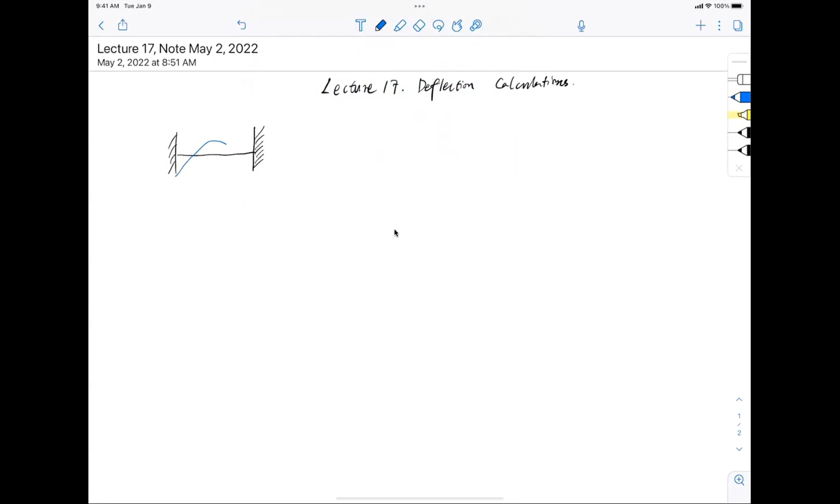And you know, the moment diagram looks like this: it has a negative moment on the left, negative moment on the right, and a positive moment in the middle. And we call this the applied moment. So MA, MA, and MA. This is the applied moment. Now, with this moment diagram, we were supposed to find one thing: only one effective moment of inertia, one IE, okay?

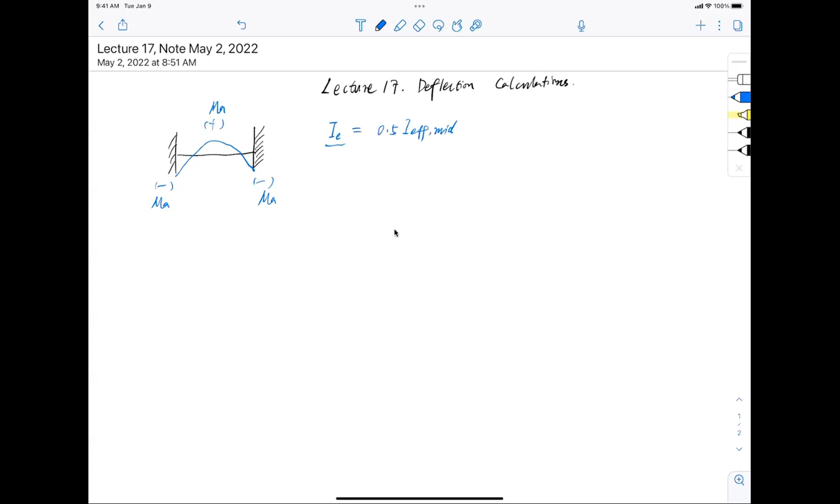Now, given that there's other I effective, we will talk about it, but this is the IE you will be using to calculate the deflection. IE equals 0.5 I effective mid, meaning the I effective at midspan, plus 0.25 of I effective left and I effective right combined. Okay, so that will be the equation for it.

Now, I effective mid, or 1 or 2, follows this equation. That is the cracking moment you calculate for this particular location. If it's midspan, it is positive, so let me just put a sign here. If it's the 1 or 2 end spans, that has to be negative. So that's the cracking moment. And then divided by the applied moment, which is MA mid, or 1 or 2. And this whole thing together in a bracket to the power of 3, multiplied by IGT. IGT is the transformed gross section, and that one has a positive sign as well if it's for the mid section.

So what do you mean by positive? Think of it. If it's positive, it means that the tension is on top. So this is positive. And if it's negative, the tension is on top. That's the difference. So positive for midspan and negative for 1 or 2, the two ends of it. Okay, so that is the IGT.

Now plus the bigger bracket: 1 minus, bracket inside, MCR, the cracking moment for the midspan and 1 and 2 ends again, divided by MA, the applied moment at midspan or 1 or 2, the whole thing to the power of 3 again, close the bracket and multiply by the cracked moment of inertia. Again, this one with a plus sign if it's midspan, and with a negative sign if it's 1 or 2. Okay, so this is the more generic equation for I effective.

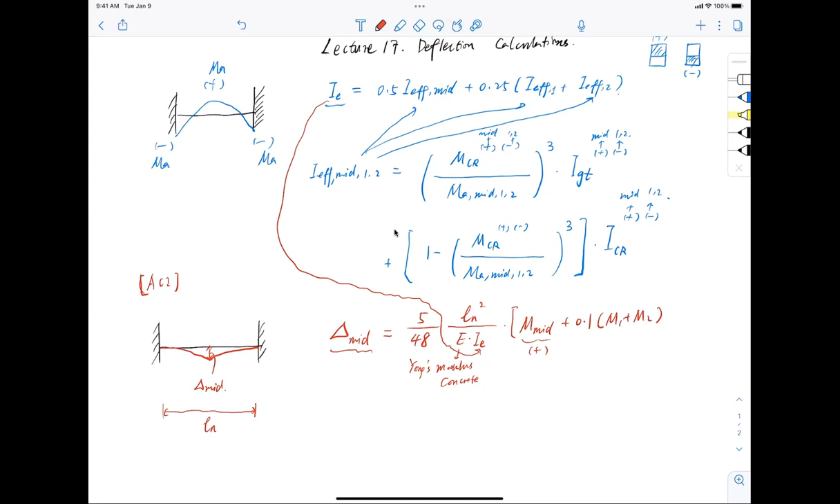So that is the deflection equation. And remember, this is for midspan. Okay, now with that, this concludes the deflection calculation equation.

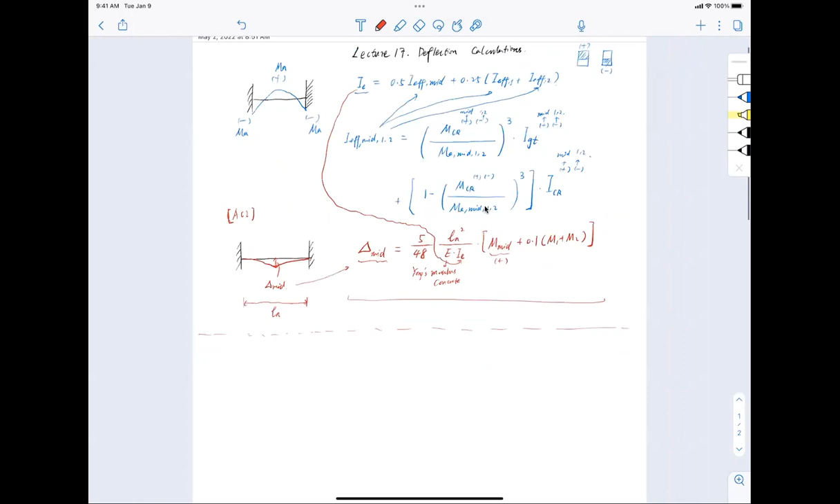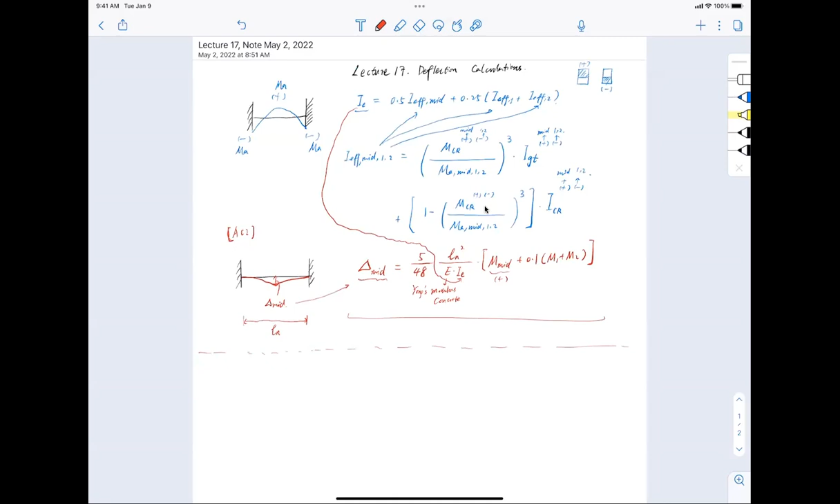Today, we're going to talk about more about this deflection, okay? So what else, right? Now, Bob, you have the IE, have the moment of inertia, you have this equation to calculate deflection. I just plug the number in, I should get deflection, right? What's so much that we need to worry about it, right? Well, there's nothing to worry about, just plug the number, right?

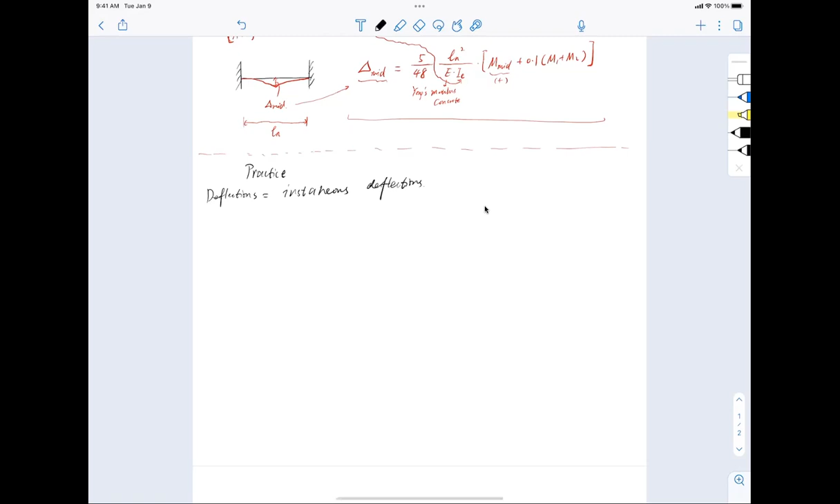However, in the construction practice, right, tells that the deflection has two components. Now the deflection has the instantaneous deflection, and also it has the long-term deflection, okay? So it is two types of deflections combined, okay? So why, right? This instantaneous deflection usually means that once you apply the load to it, instantaneously you have a deflection. Then as time goes by, you also have a long-term deflection, okay?

Now, specifically, let's dive in to see what's going on here, right? So there's delta total, now we call it delta total, is a total deflection, should equal to the instantaneous deflection. However, this instantaneous deflection usually is in terms of live load. I put I here, instantaneous deflection, live load. Okay, now there's also another part of instantaneous deflection that is caused by the dead load, and that one we call it delta ID. All right, pretty much just use the dead load and calculate deflection and call it instantaneous dead load deflection. But be careful.

So you think of it, the live load induced instantaneous deflection will go away if you remove the live load. So once you put something on it, it will deflect. You put it away, it recovers, right? So nothing much to worry about. However, the dead load is always going to be there. So that's a slight difference, okay?

Now, on top of that, some of the live load did not go away. Sometimes, some part of the live load does not go away. And this, they call it sustained live load. And usually we tell you how much percentage of the live load will sustain, okay? How much percentage of live load will sustain. So now you have instantaneous deflection dead load, and this is long-term actually. A little bit confusing, right? This is actually long-term, and this sustained live load is also long-term. Okay, and this is actually short-term.

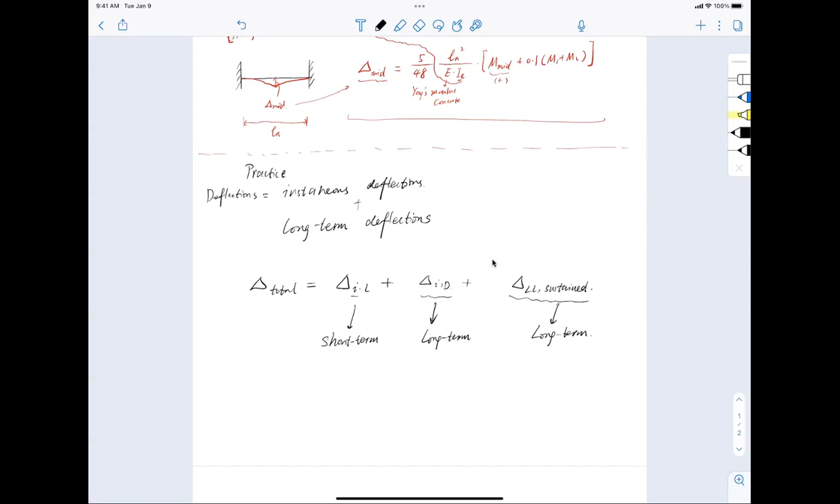Okay, short-term. All right, so if that's the case, how do we differentiate? The difference between the long-term and short-term is that for short-term, you just calculate the deflection as it is and keep it inside the component of the total deflection. For the long-term, there are going to be coefficients applied in front of it. And specifically, we call it time-dependent coefficient lambda here.

And this lambda is a variable of, it's a function of variable of T naught, which is the time point or beginning of the time point when the dead load is applied, and to the infinite time, right, to forever. That is the coefficient. And then there's a lambda infinite as well for the sustained live load. So these two coefficients actually tell you how much of the time dependency of this long-term deflection you have with respect to the time, okay? So we call this lambda a function of t, function of time, okay? And this is so-called the time-dependent coefficient, all right?

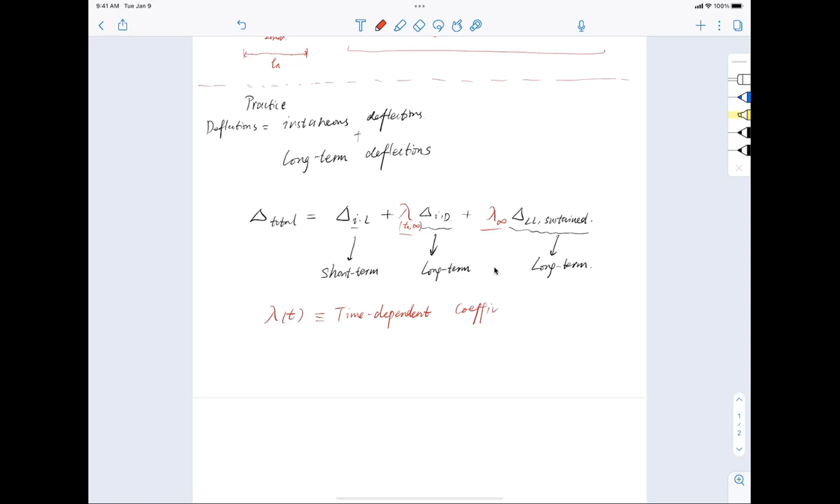Okay, so you see in terms of deflection calculation, you put the live load there and calculate short-term deflection and keep it as it is. And you put the dead load on top of it, calculate long-term deflection, multiply coefficient in front of it. And you also calculate the sustained live load caused deflection, multiply coefficient in front of it. And that consists your total deflection. So lambda t is a time-dependent coefficient. You can find this from ACI.

24.2.4.1, okay? And now this term lambda is called time dependent. It's a function of another coefficient, xi, as a function of t, divided by 1 plus 50 rho prime, where rho prime is the compressive reinforcement ratio. Now I've seen rho before, right? Rho is the tensile reinforcement ratio, and rho prime is the compressive reinforcement ratio, and AS prime is the area of compressive reinforcement.

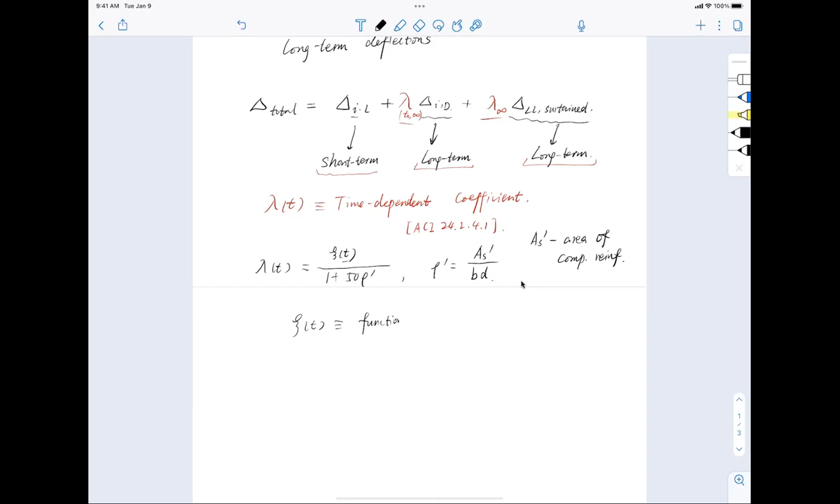AS prime is the area of compressive reinforcement, and this has to be compression, not tension, okay? And now, because xi of t is a function of time, okay, it is a function of time.

And that function of time reads like this. Actually it's a quite nonlinear function. This is xi of t, with a function with respect to time, and this is t, time. Usually this time is in terms of months: 1 month, 2 months, 3 months, and so on and so forth. So 0, 3, 6, 12, 24, 36, 48, all the way to 60. That is the total time.

And now if you look up into ACI 24.2.4.1, you see this table. And when you see this table, you realize that it's capped at 2.0, meaning the maximum coefficient you're going to get for xi is 2.0. It has to be smaller than or equal to 2.0.

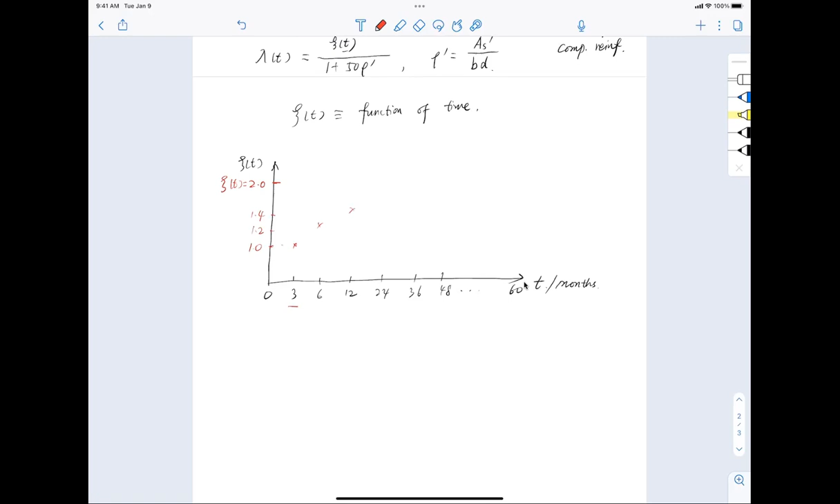So that means that if I draw the curve, at 3 months I have a xi equal to 1.0, right? So this is my first point. At 6 months, it is 1.2, right here. And then at 12 months, I got 1.4. And then so on and so forth. So you draw the curve, and it looks like this, all the way plateaued at 60 months.

And after 60 months, let me put this here: it is constant at 2.0. After or at 60, it is 2.0. So that is the table where you can find the xi number.

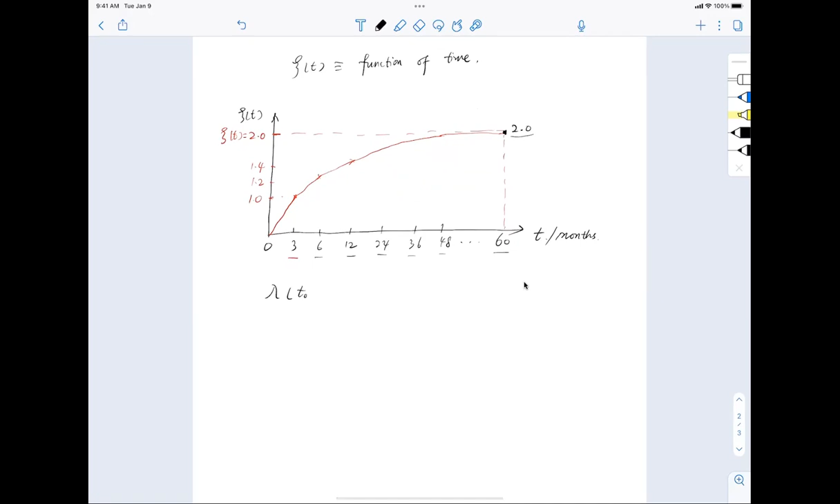It depends on how much time the load has been exerted on the structure. So now to get this number, lambda actually has 2 bounds, where one bound is the time when the load is applied to the structure, and the other is how long the structure will survive. So lambda has 2 variables: t naught is the lower bound, and infinity is the upper bound. So that equals lambda infinity minus lambda at t naught.

I can give an example. For example, if I'm trying to find lambda as a coefficient where at 3 months the load has been applied to the structure, and I want to find it in terms of forever, infinity, this will be the total deflection that you have, and this will be lambda infinity minus lambda at t equal to 3 months. Now lambda infinity, you know that is bigger than 60 months.

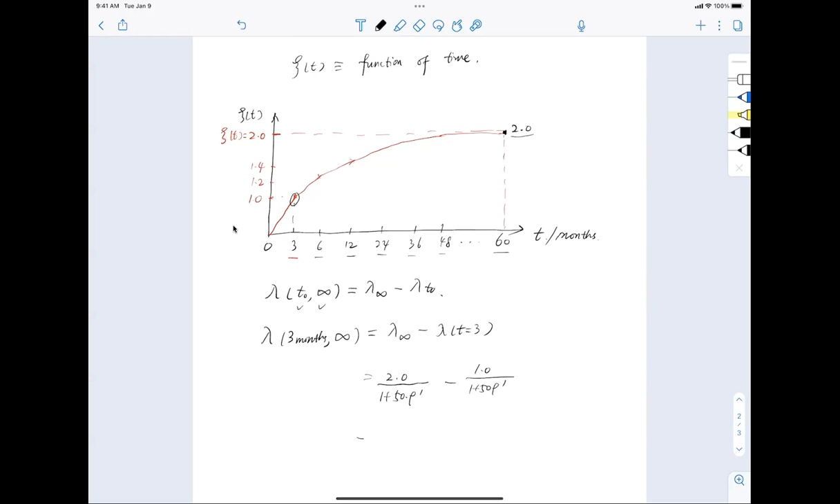So that is lambda at time infinity, which is 2.0 divided by 1 plus 50 multiplied by rho prime, minus lambda at t equal to 3, which is 1.0, because xi is 1.0 divided by 1 plus 50 rho prime at t equal to 3. So that gives you a number of 1.0 divided by 1 plus 50 rho prime.

And say I have rho prime equal to 0.001 for the compressive reinforcement ratio, usually given, or you can calculate it. Then I can plug this number in and get this to be 1.0 divided by 1 plus 50 multiplied by 0.001, and I got this lambda to be 0.95, or 95%. So that is the coefficient lambda for 3 months of loading to forever.

I want you to put a notice here. This is for a very small amount of compressive reinforcement, about 0.001 compressive reinforcement. If you say that I want to have a lambda equal to time equal to 3 months to infinity, but with a compressive reinforcement ratio of 0.01, this number actually reduces to be 1 over 1 plus 50 multiplied by 0.01, equal to 0.667. You can see that this drastically reduces compared to that.

That tells you that the compressive reinforcement has a significant contribution to the deflection calculation. To be precise, the more steel you have, the higher the compressive reinforcement ratio, the more reinforcement you put into it, the less deflection you have, the less long-term deflection you have. This is a very interesting point: the more compressive reinforcement you have, the less long-term deflection you will have in the RC beam.

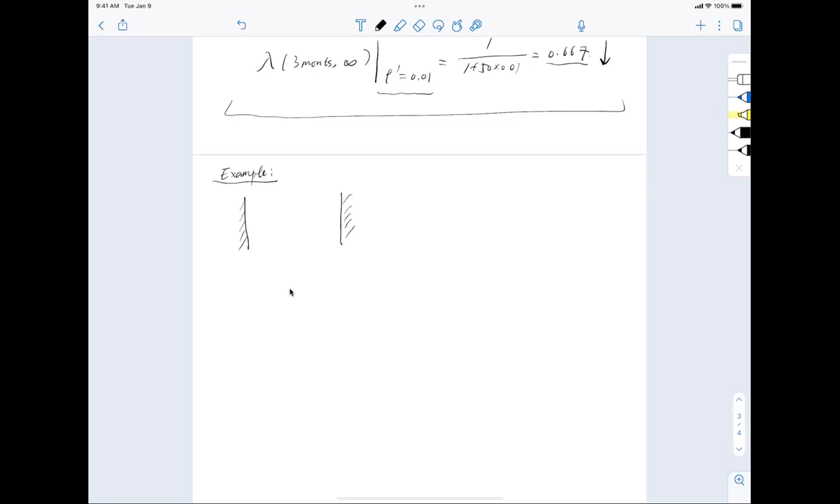I have a fixed support, I have a beam, and the moment diagram reads just like this. This moment diagram has a negative 225 kip-foot and negative 225 kip-foot, and has a positive bending moment of 162 kip-foot, 162 kip-foot.

And then I know that the applied loading has 1.2 dead plus 1.6 live. That's all I'm saying. I just put this equation here and I want to use it, but I'll show you how to use it. I know this is the factored loading. So this is Mu directly, and equal to 1.2 MD plus 1.6 ML.

Now, just to give you a sense of how much the dead load is—this is unfactored, equal to 1.65 kips per linear foot. And the live load is 3.3 kips per linear foot. That is the dead load and live load distribution.

And I tell you that 20% of the live load, omega LL, is sustained. 20% of live load is sustained. We'll use this later.

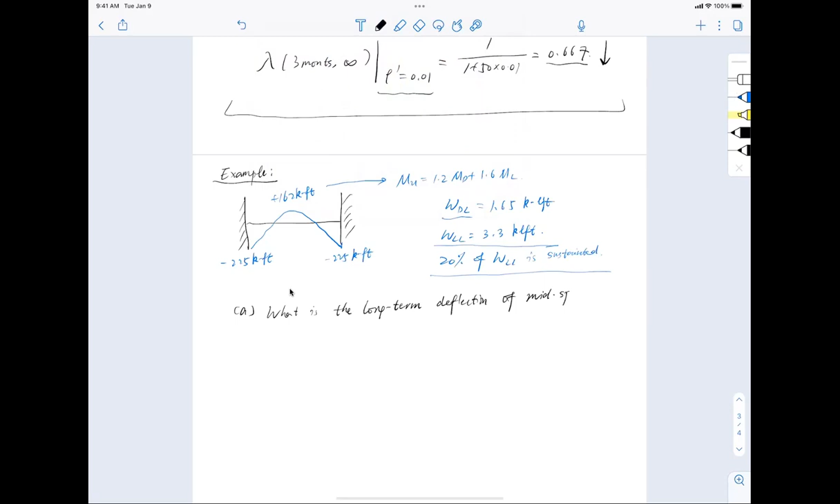Now, the two questions I'll ask you, same as on the exam. First is: what is the long-term deflection of midspan?

And question B: what is the long-term deflection caused by the sustained live load? So these are the two questions.

So how to solve this? Well, we're going to use that equation. To solve for this, I'm going to use delta midspan equal to 5 over 48, multiplied by Ln squared, over EI—and don't forget this is Ie—inside the bracket, the midspan moment M_mid, plus 10% of the combined M1 plus M2. This is the equation we're going to use to find out the deflections.

And just to finish all the criteria for you, the span length Ln or L equal to 25 feet. So this is the equation we're going to use to find the deflection.

So step number one, I need to find the instantaneous deflection, delta I. I know that delta I has delta I dead plus delta I live, two components. So the live load, total deflection—before I go on to find out each component, the total deflection is going to use this equation.

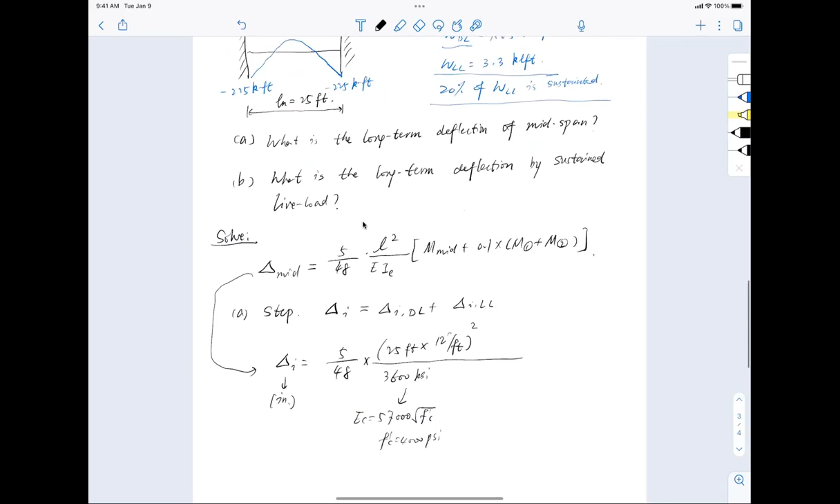I haven't said it in the problem, I should have done that. So f prime c equal to 4,000 PSI concrete. That is the Young's modulus, and then multiply by I effective. In this case, I am going to say that I give you the I effective, and the I effective equal to 12,395 inch to the power of 4.

So Bob, where did you get this number? This number we got from previous lecture, okay? Previously. And in the exam, I may not give you this number, but I give you some number. You can easily calculate this number, okay?

So that is the whole thing in front of the bracket. Let me put the bracket here. It's too long, so I'm just gonna do the midspan moment, which is right here. The middle span has a 162 kip-foot moment, and that one plus 0.1 bracket inside, negative, because this is negative bending moment, okay, 225 kip-feet multiplied by 2, because I have both ends of it.

The whole thing has to convert to be inches, so 12,000 pounds per kip, inch per foot. And I got this number to be delta I equal to a total deflection of 0.29498 inch.

0.29498 inch, okay? And I know for a fact that this has two components: delta ID, which is the dead load, and delta IL, which is the live load. Although I don't know which percentage each component would take, this is the total deflection I'm getting, okay?

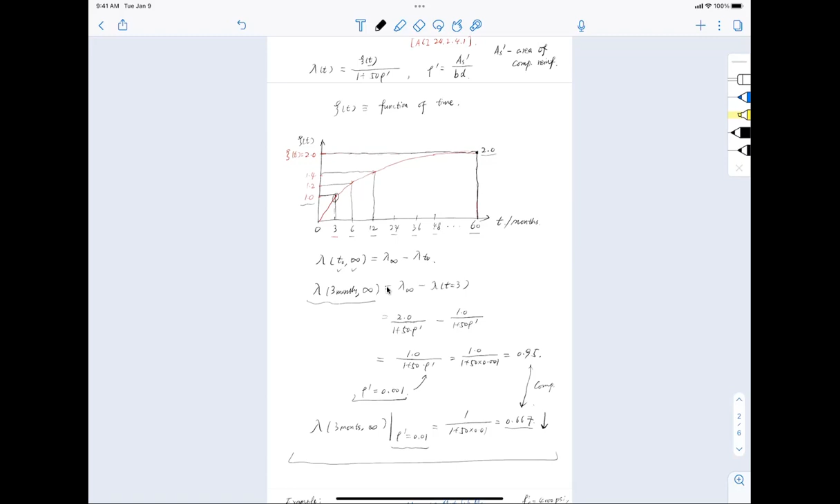When I give you the tables, I only show you 1.0, which is 3 months. So let me just put this line here. 1.2, which is 6 months. 1.4, which is 12 months. And when you have 60 months or more, you have a 2.0. So you only need to remember 1, 2, 3, 4 points.

Okay, you only need to remember these 4 points. And that's all you need to know for the deflection calculations. All right, so it's not too bad.

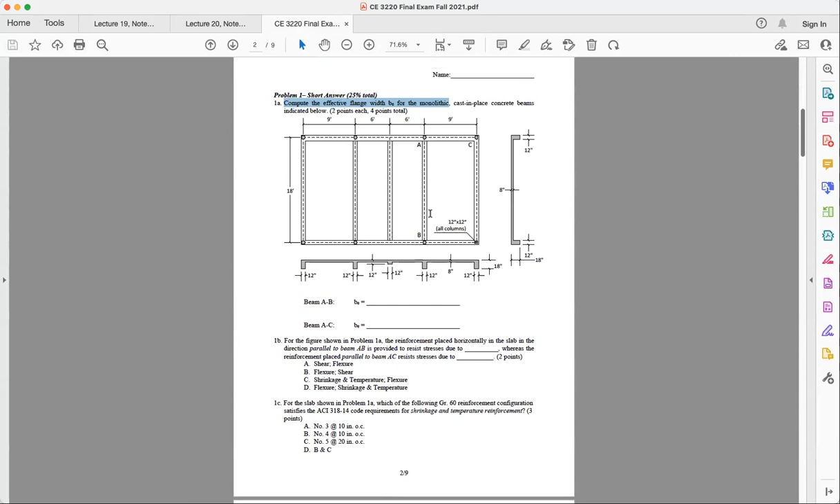So this is the past year's final exam, okay? I want to quickly show you. Now, this is the effective flange width be for the monolithic. We have done this in the first part of it, so you will not see this problem, okay? Now, for 1B, problem 1A, 1C, all this, these are in the first part of the exam. You will not see this, and you will not see this, all of this, okay?

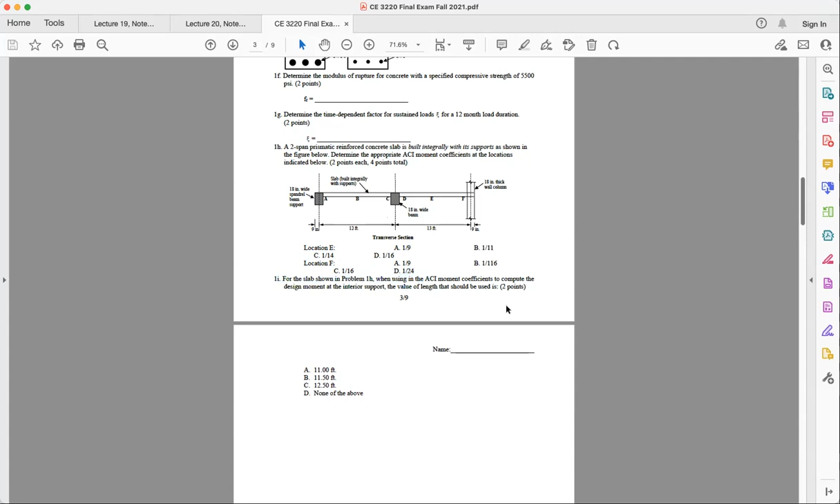Now, you see the 1H is about moment coefficient, okay? So all we have done is show you the structure and ask you to find the moment coefficient. Ask you to find moment coefficients. All right, and then we will try to ask you what kind of span length you need to use to find out the numbers. That is pretty straightforward.

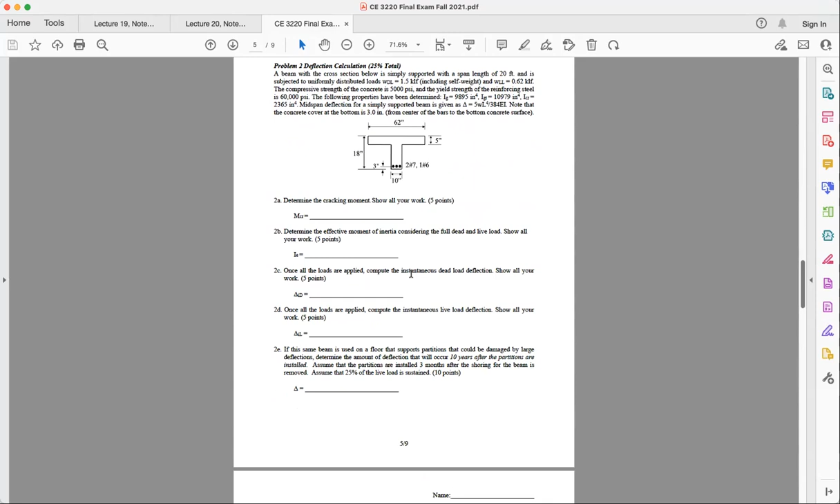Okay, now this is the deflection problem I want to share with you. So let's read together. A beam with a cross section below, which is a T-beam, simply supported at 20 feet. It's subject to uniformly distributed load, dead load 1.5, live load 0.62. Compressive strength of concrete 5,000, yield strength of bar 60 KSI. Now, knowing that, you probably don't need the yield strength, okay? You don't need the yield strength.

Now, here's a nice part. The following properties have been determined. That means the cross section is given. The transformed cross section is given. The cracked section is also given, okay. That means we spent some time in the previous lecture trying to ask you to calculate these, but in the exam, the homework, usually they're given. All right, usually they're given, okay.

So I don't have to worry about the detailed calculation if I were you for the final exams, okay? And also on top of the mid-span deflection for simply supported beam, okay, be careful. This is simply supported beam, not continuous beam, okay. It's given this much, okay. Note that the concrete cover at the bottom is 3 inches right here.

So blah, blah, blah. First thing, find the cracking moment. So how do you find a cracking moment? I gave you a few minutes, right? Read the problem. Now a few minutes, maybe 30 seconds. I have 5 minutes left. Read the problem, right? So I want to ask you, how do you find a cracking moment?

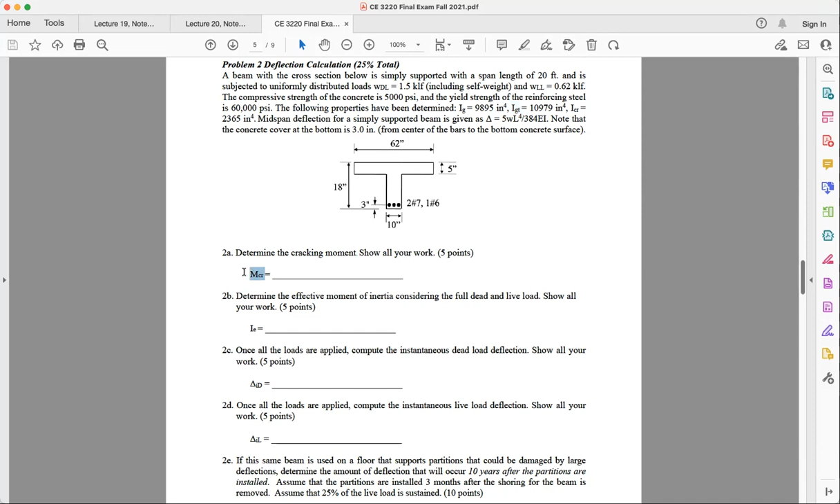Y bar top equals, it's a fraction, right? And on the top, there's got to be Y1 A1 plus A2 Y2. Y2, there you go. The bottom, A1 plus A2. There you go, right? So that is the equation to find the neutral axis. So from there, you can get your cracking moment. Okay, so that takes about 5 points.

Next one, determine the effective moment of inertia considering full dead and live load. Show all your work. Wow, this is too much, right? I effective. How do you do that? Full dead and live load. How do you do that?

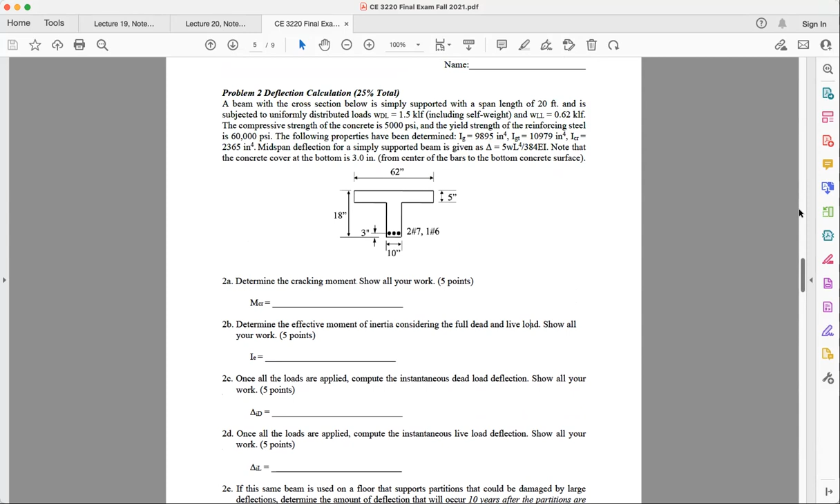By the way, thank you, Jonathan. So let me find my next person here. Who's here? Let me see here.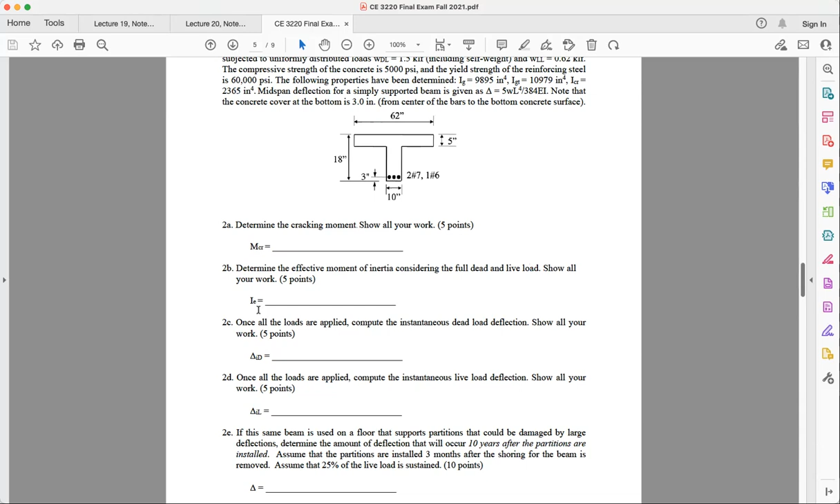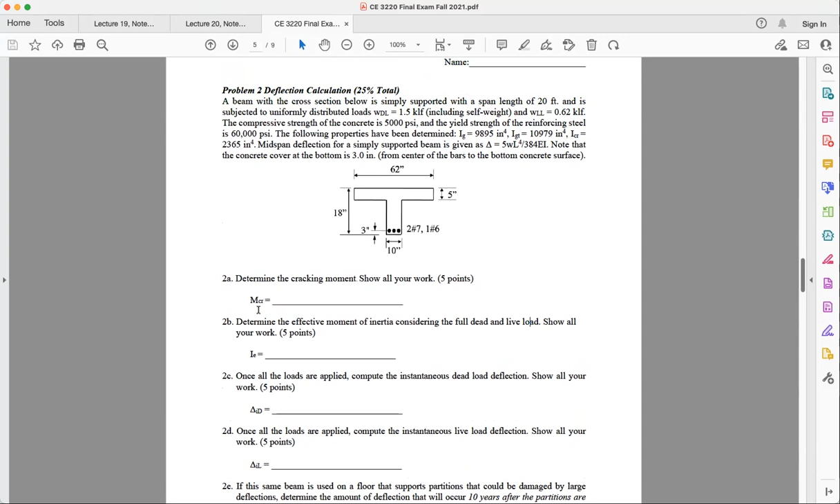Okay. So quick question for you, sir. So I effective, right? IE, right? Now, what we just talked about, I want to give you a fair hint. What we talked about just now in the lecture, there are two conditions. One is continuously supported, fixed end, remember? The two ends are fixed. And the other is for simply supported beam. For simply supported beam, you use that equation MCR over MA to the power of 3, right? Right.

For the other one, the continuous support, I use like mid span 50% of that plus 25% of the ends, right? So my question to you is, which one do you use? The first one. The first one, right? There you go. So it's not that bad. So this one, you just need to find the M crack. So if I can annotate on this, all you have to do for this one is use that equation MCR over MA to the power of 3.

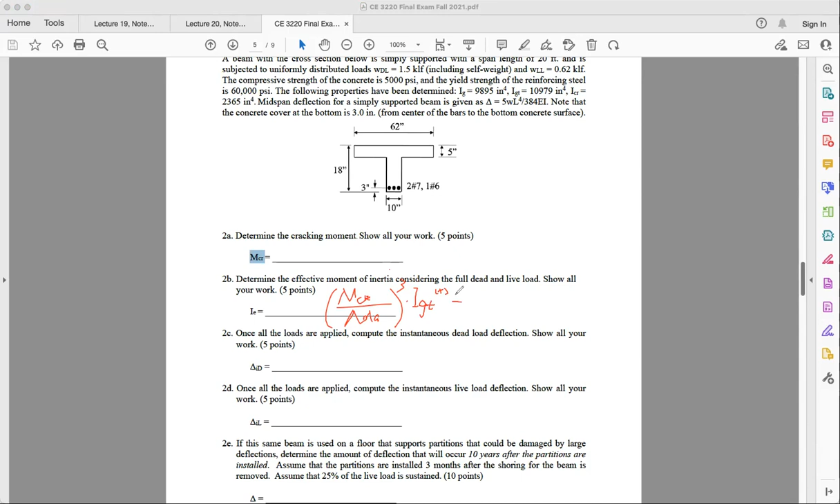And thank you, by the way, Brett. And then IGT, and this is simply supported, so you only have positive bending moment, positive IGT, okay? Plus bracket 1 minus MCR over MA to the power of 3 again, bracket outside, multiply I crack. Now IGT is given from the problem, ICR is given from the problem. All you have to do is apply MCR and MA.

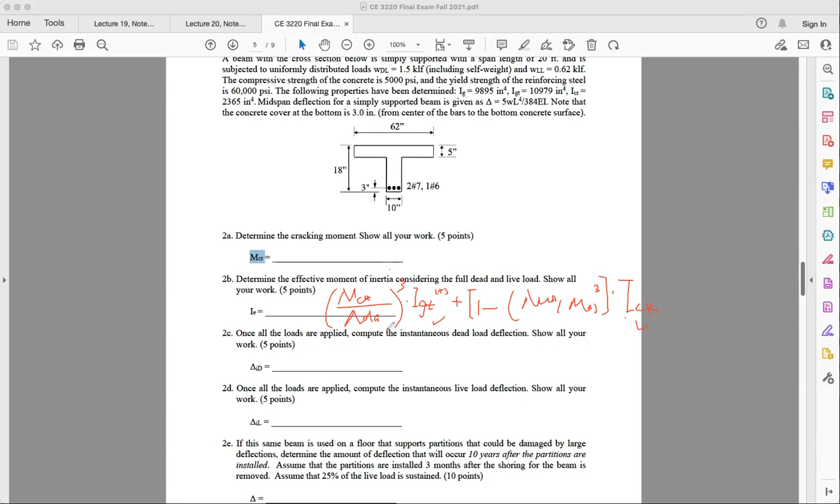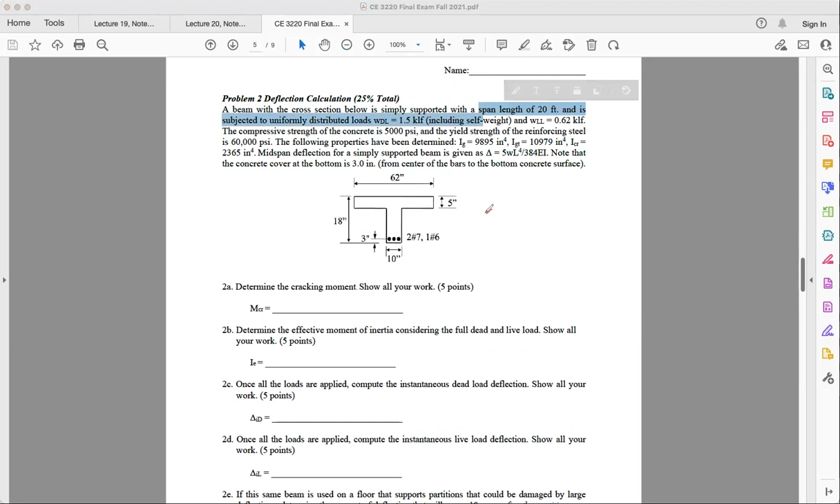What is MA? MA is the bending moment of this midspan. So all you have to do is find out the bending moment of the midspan. That's the job, to find out the maximum bending moment in the midspan. How? It's a simply supported beam. Now I have a dead load plus live load, so you need to find out omega U equal to 1.2 dead plus 1.6 live, right? So you have this uniformly distributed loading here.

And the moment in the middle span for this simply supported beam is 1/8. Use that equation: MU is 1/8 omega U L squared. Omega U is what you calculated here. L is the span length. What is span length? 20 feet, right? So L equal to 20 feet. And voila, you find out the bending moment. This is MU, but it's actually in the middle span, so this is MA in the moment diagram. Actually that's not too bad. You find out MA, you plug in that equation, MCR over MA, and you find out IE.

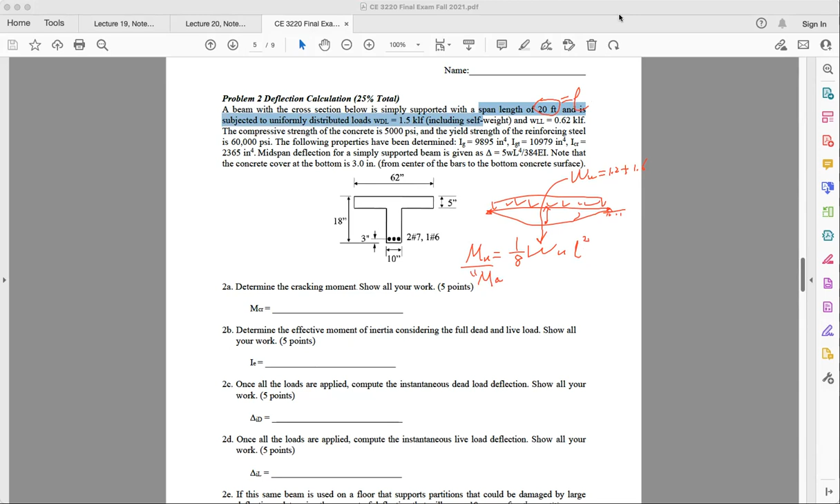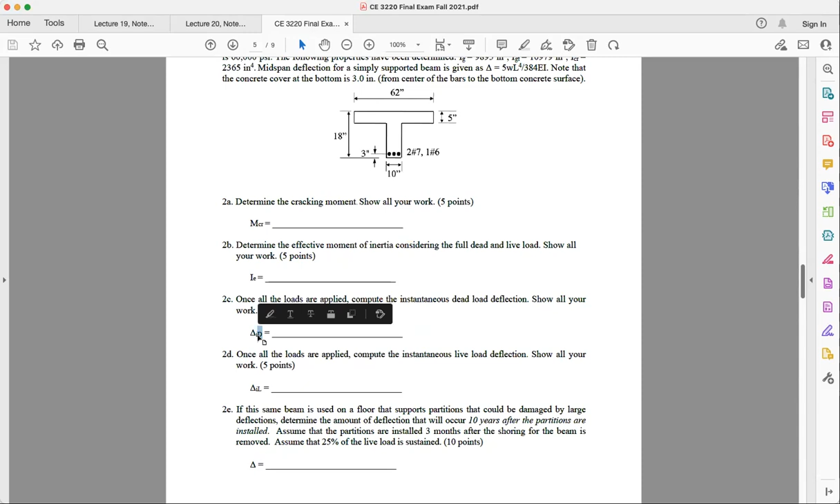Now, once you have IE, the next question is, once all the loads are applied, meaning everything's applied from the very beginning, I want to find instantaneous dead load deflection delta ID. How do you do that? I'm just going to use this equation, and instead of W here, I put WD, and to be more precise, W equal to 1.2 dead load. That will go into the deflection calculation to get your instantaneous dead load deflection. When you see instantaneous, there's no lambda in front of it, so there's no time dependency. So that's not too hard.

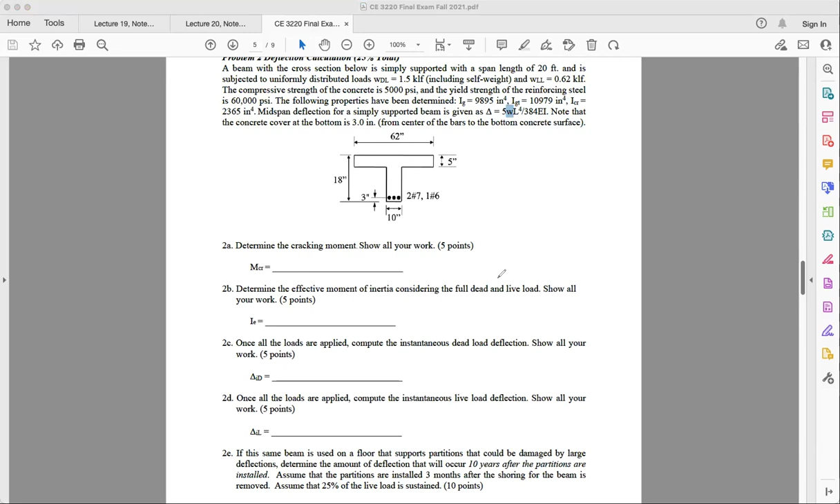Then move on to the next one. Once all the live load is applied, the live load deflection. You do the same. Instead of delta ID, you have delta IL. Instead of 1.5 dead load, you have 0.62 live load, and just plug that in, and you can get this number here. So 2C and 2D seem to be trivial, right? Not too difficult. Last one.

If the same beam is used as floor support and it could be damaged by large deflection, determine the amount of deflection that will occur in 10 years. In 10 years. So first thing, what is 10 years? What is the 6 months?

6 months, 12 months, 60. 60 months is 5 years. So 10 years means almost forever, okay?

Assume the partition will install 3 months after shoring of the beam is removed. All these words just tell you that the delta total is basically delta infinite, okay? So all these words tell you that lambda in front of live load starts from 3 months to infinity. Why infinity? Because 10 years is more than 60 months, that means forever. More than 5 years, that's just forever in our book, okay?

Then this is delta I, and there's a coefficient in front of it, sorry, not live load, my bad. This is dead load, okay? This is delta I dead load. Plus the live load, delta IL instantaneous deflection, okay? Then plus another lambda, and this is called sustained.

So let me just correct this. This is now 3, okay? This is beginning, because the dead load is applied at the beginning. Only the sustained live load, which is right here, is from 3 months, okay? And this is the live load sustained. Okay, let me explain to you.

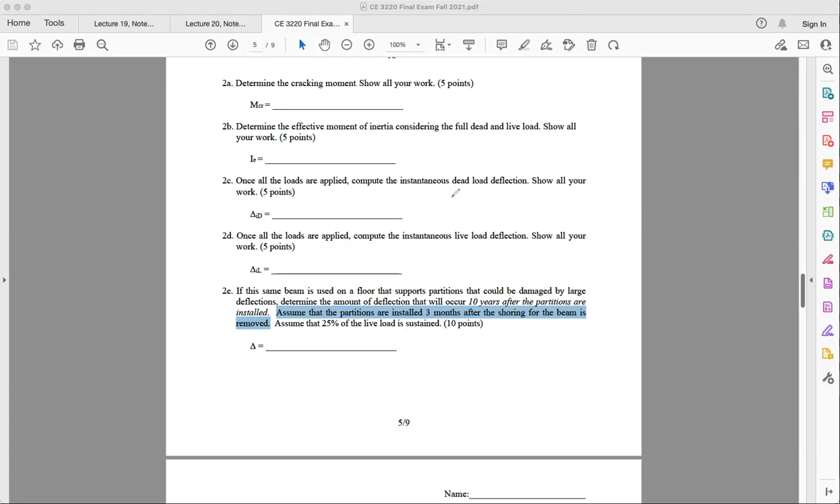And fortunately for us, in this section, do you have any compression reinforcement? Let's take a look. I have a simply supported section, the middle span, which is positive bending moment, and I only have tensile reinforcement, so rho prime equals 0.

So to finish that, I have delta equal to 2.0 divided by 1 plus 0 multiplied by the dead load, plus the live load, plus 1.0 divided by 1 plus 0 times 0.25, 25% of the live load. I have dead load and live load previously calculated, so I can easily plug them in and get my deflections.

All right, one more sentence and I'll be done. Why am I doing this? I'm trying to show you that although the concept is fairly new, the problem is not hard. So don't panic. Try to reason why we have deflection calculation, and how we can get a deflection calculation using simple concepts.